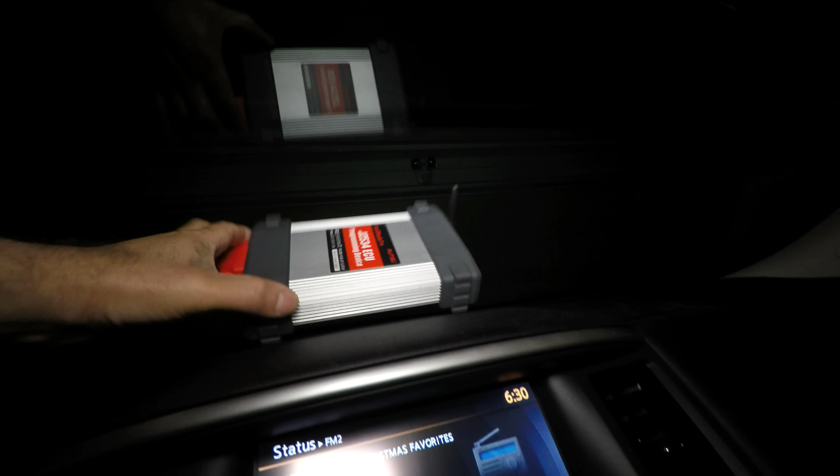Alright guys, well here I have a 2015 Nissan Pathfinder, and I have a MaxiSys Pro, and here is the programming device, the VCI, the communication wireless VCI, and you can also have it wired.

I'm gonna check it and see. This is the Pathfinder Platinum. It has navigation and a lot of stuff on there. We're gonna see what this MaxiSys Pro is gonna be able to do with this thing.

It's a 2015, so I'm just gonna shut off the lights and start recording and do the auto scan. All right, well we're gonna go to diagnostics, and we're gonna look for Nissan. Usually when you buy the tool, you're gonna have all the logos, like this.

Like Acura and Honda just updated a while ago, but the logos I actually changed them myself. I did another video on that. It's not up yet, but I will post it next to this one, how to change your logos back into the car logos.

Okay, so this is a Nissan. Actually, I sent them a report. See, it already recognized the VIN number here, that I didn't have communication with the transmission control module, and they actually sent me a beta software for Nissan.

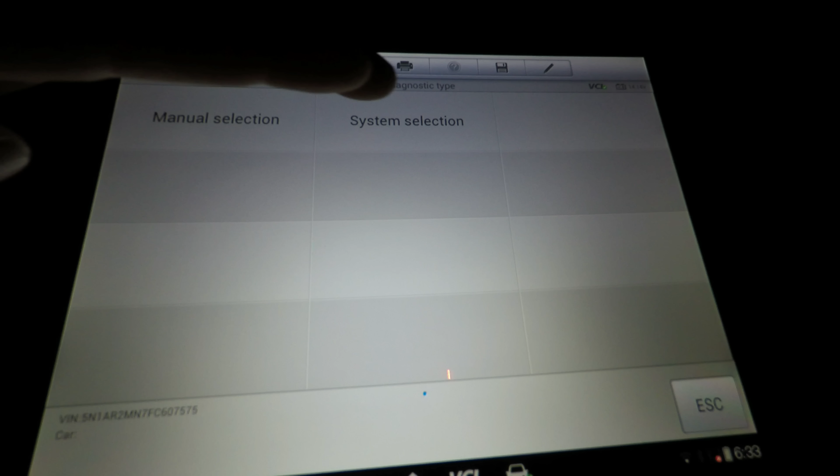So since this is a 2015 vehicle, we're just gonna check it out and see. Let's go ahead and system selection, we're gonna see what's on. Let's go ahead and see what's on service first. He has the NATS feature, which is the immobilizer, and miscellaneous functions.

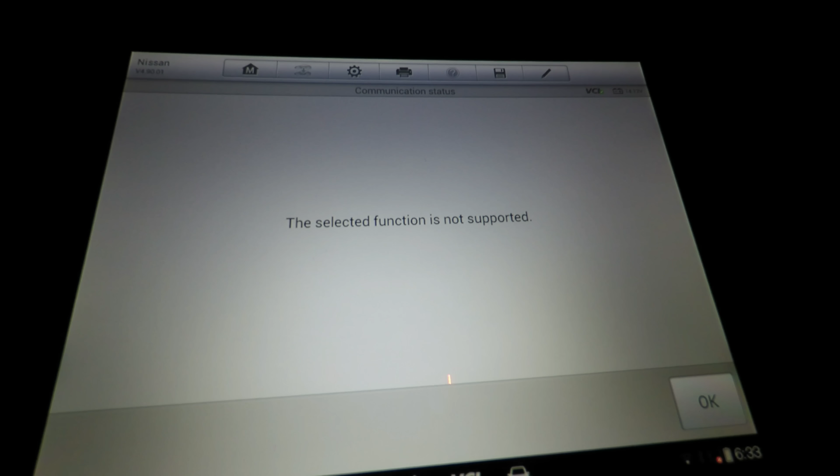Okay, that is not supported. So we hit here, we go back, and then we're gonna select diagnostics. Okay, I see that it's not. Okay, I gotta press OK. We're gonna press escape, I had the camera there and I couldn't see.

Let's go ahead and go to diagnostics. We can do an auto scan or control unit. I'm going to do an auto scan and see how many controllers this scan tool is going to be able to pick up. Actually, the vehicle is running. I'm going to go ahead and do the auto scan and see what happens with the vehicle running.

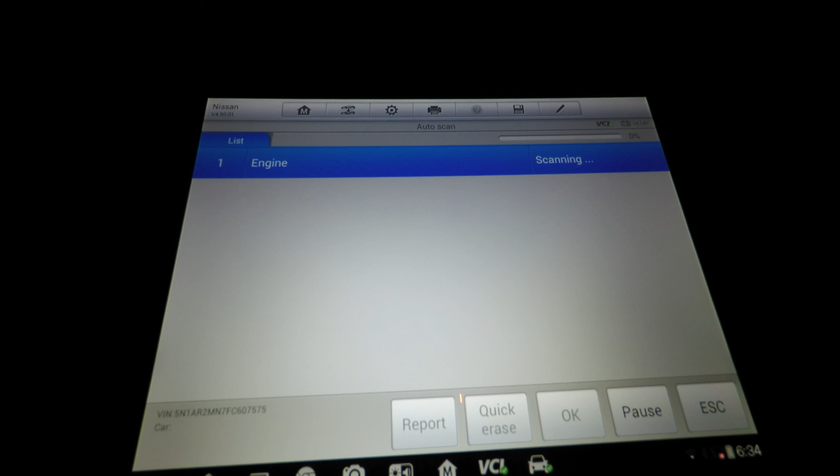It's a little bit cold outside, so I have the heater on. So it's doing an auto scan. It's gonna ping all the modules, and the ones that are there, it's gonna scan them to see what it picks up. I have a

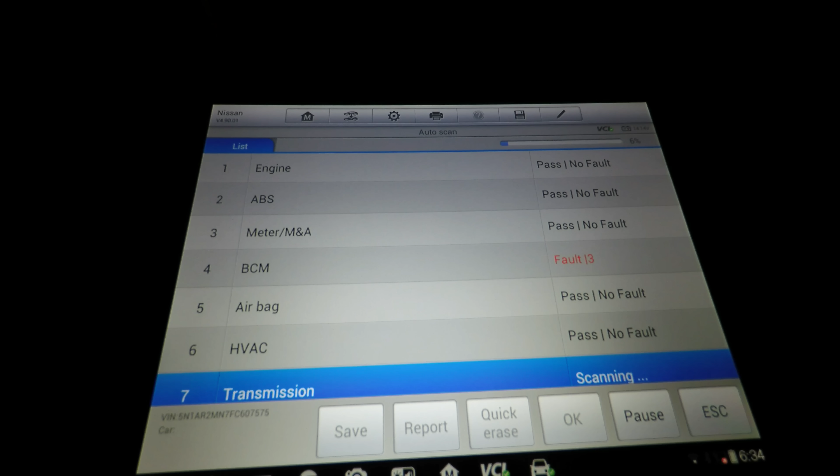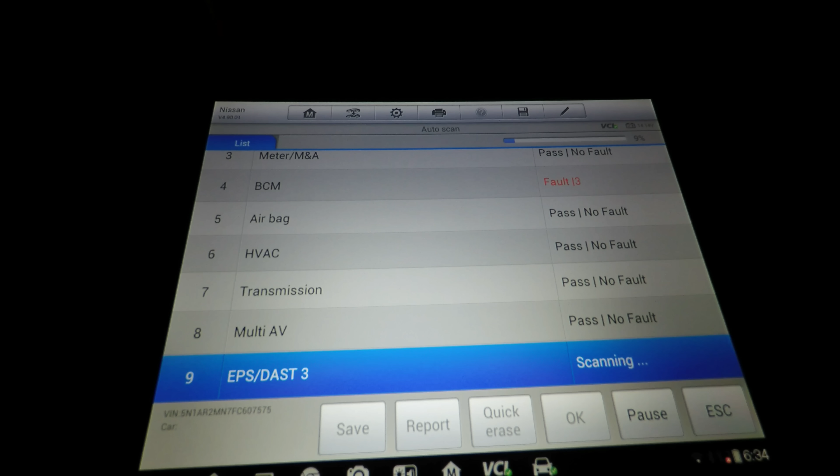tire pressure monitor light on. Body control module has 3 faults, and it's a 2015. It only has 3,000 miles, 2,933 miles. It just did the multi audio video. Body control module has 3 faults. Probably is gonna have to do something with the tire pressure.

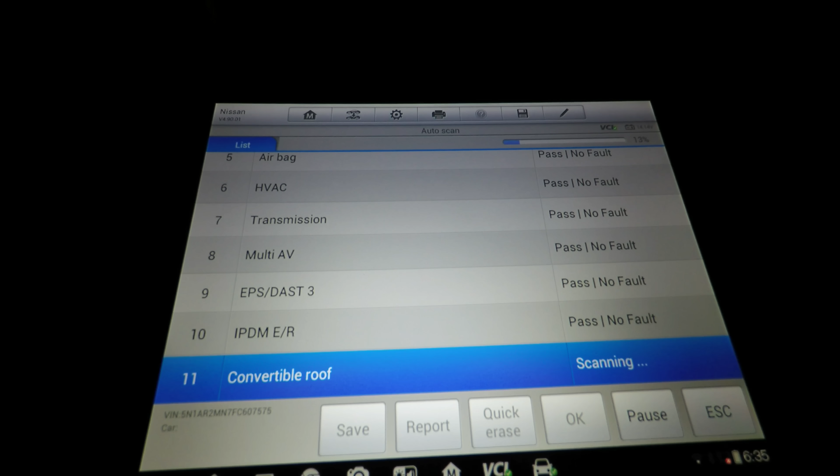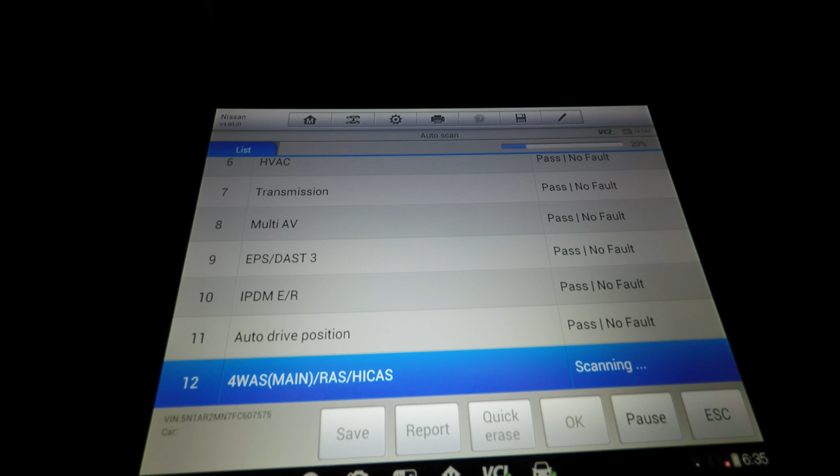It's going fairly quickly. Well, it's still over here. Once that thing is full, right now it's trying to figure out how many control modules are on the vehicle. It's going to take a little while. I'm going to keep recording, I'm going to keep it live.

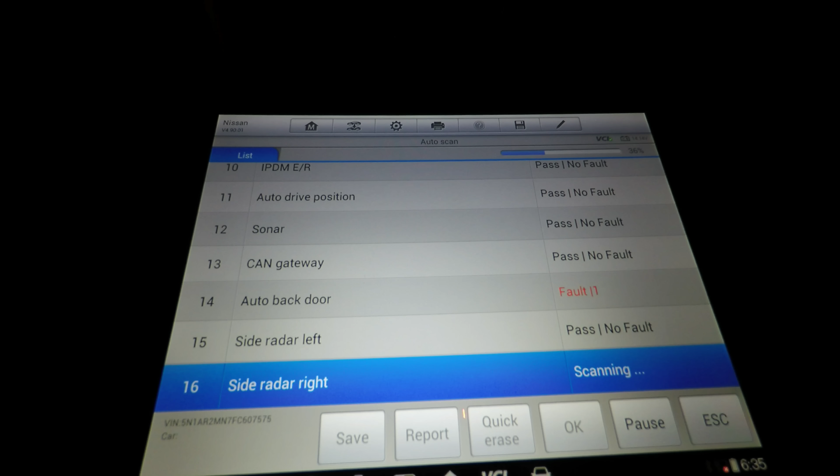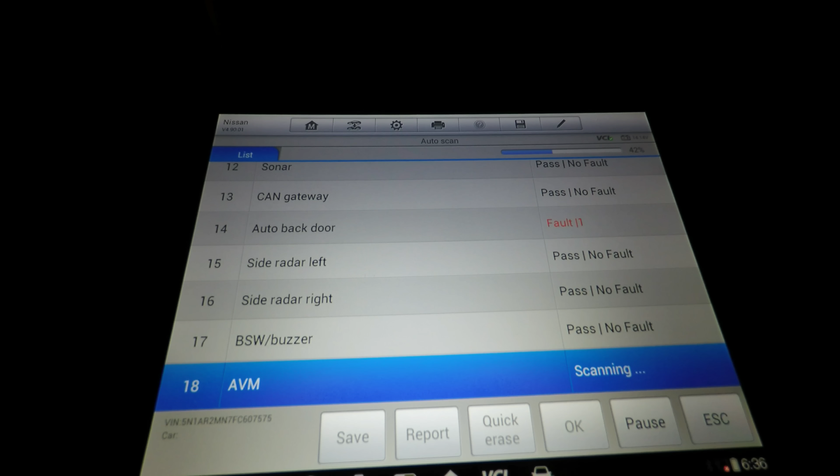Now at first, this is the beta Nissan beta software. It did not recognize the transmission control module, so I sent them a data log, and they responded fairly quickly. They sent me the beta software that they were working on to try it out, and they sent it to my tool serial number.

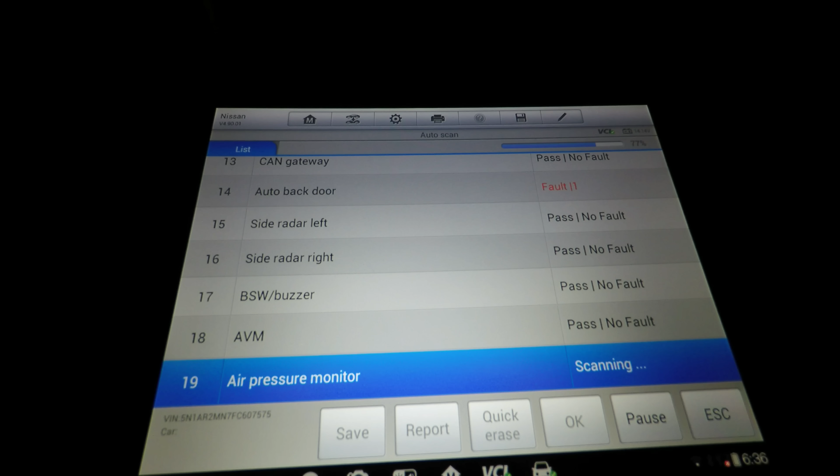And I'm kind of liking this. I barely bought this tool, but I'm kind of liking this, the way it is set up. I also own some other tools. I actually still own the 708, the DS708 from Autel as well, and I have a Snap-on Verus. Some of you guys already seen me use the Snap-on Verus and the DS708.

This is the MaxiSys 908p. The P is for Pro, which has the J2534-1 and 2 programming box with it. It comes with it. The programming is not available for now. Autel says that they're gonna come back online again. I'm not sure what's going on with that, but so far as a scan tool, it's pretty good.

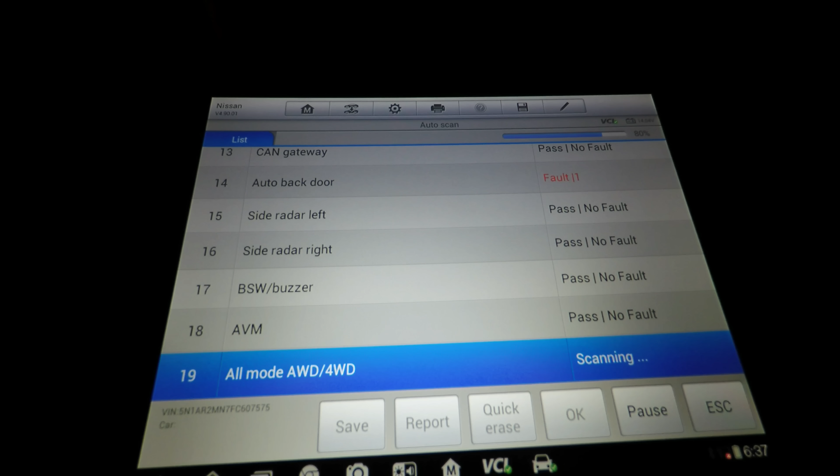The 708 is a great tool, and this is like an upgraded version of that tool, so it has to be better. Still going.

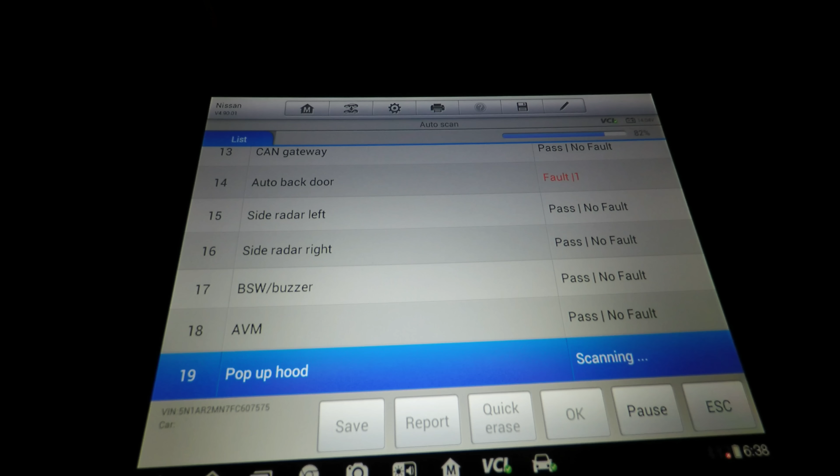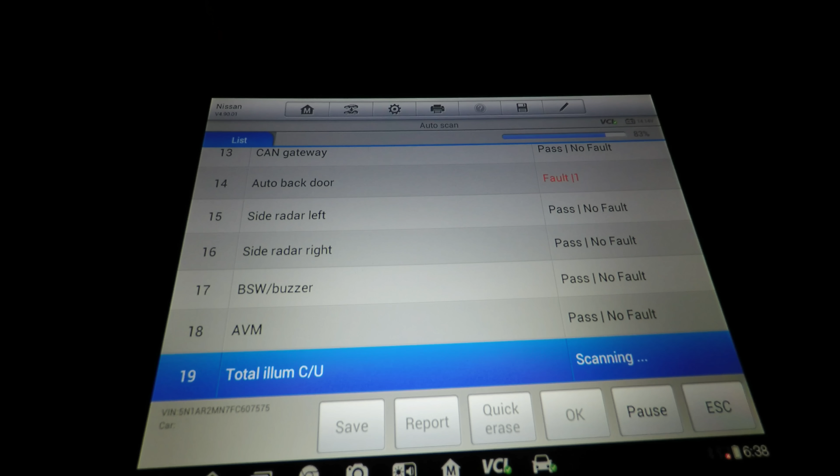We're at 83% now. What I'm interested in is the transmission control module, that's my main concern. That's what I do for a living, I rebuild transmissions. So as long as everything is good for transmissions, we're good to go. And of course, it's a nice feature that it can diagnose all the modules on the vehicle.

So like I said, it's a 2015 Nissan Pathfinder Platinum Edition.

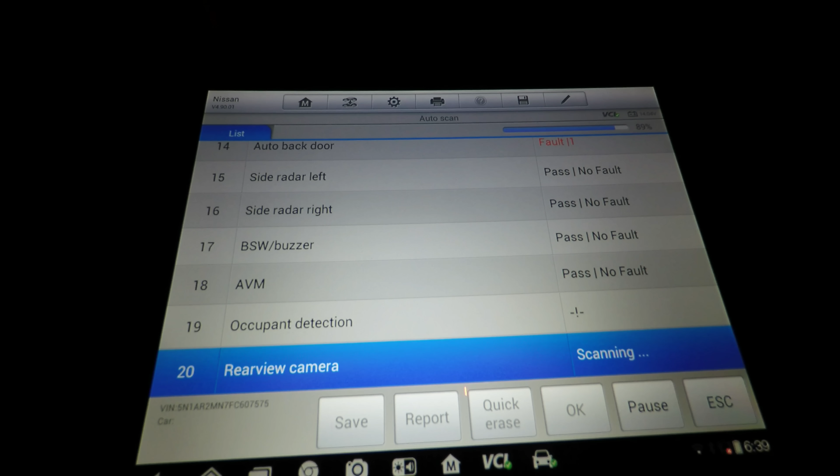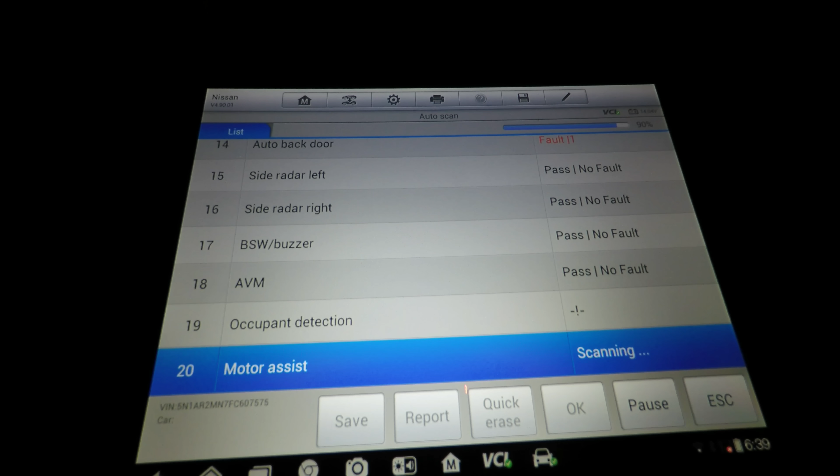Side blind cameras, he's got 2 cameras on the sides as well. I guess he didn't pick those up. When you put the vehicle in reverse, you can see the rear camera, and then the side cameras, I'm not sure where they're located, looks like they're underneath the mirrors. You can actually see the bottom of the street or driveway or whatever you're trying to maneuver.

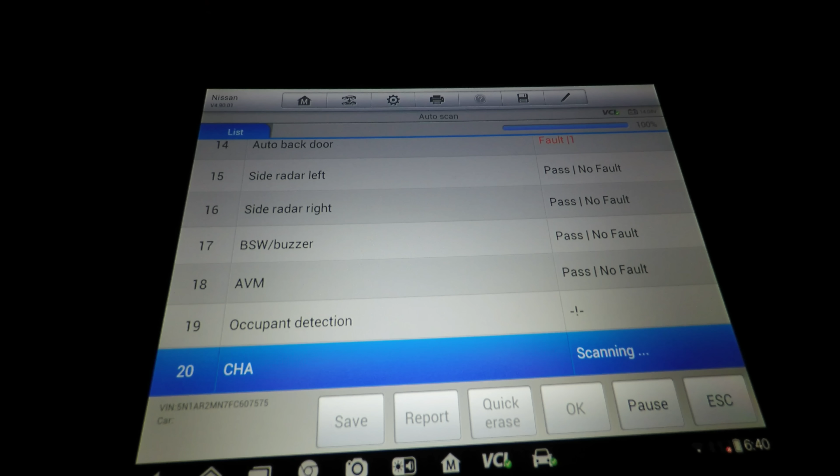It says 100%, but item number 20, or control module number 20. The good thing I like about this thing is it already scanned all the modules, right? And it found 19 modules.

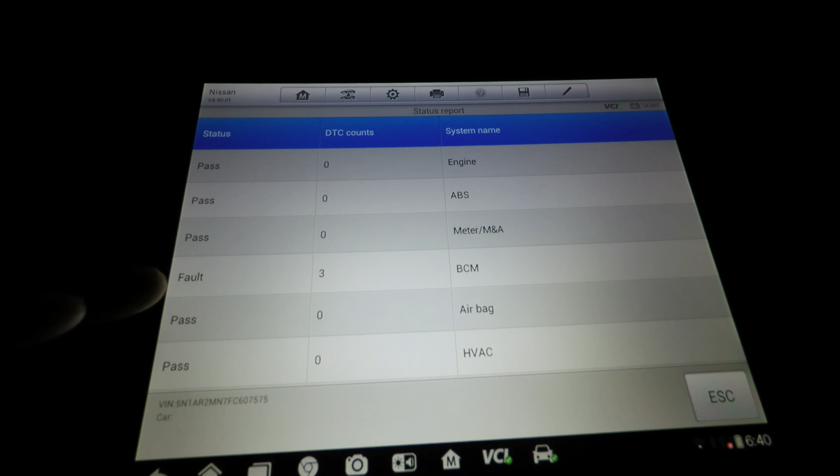Now what you can do is click a report. I'm going to click on report, and it gives you all the modules that passed. Like body control module has 3 faults, right? And then we go and look for more faults. First it's going to tell you auto back door has 1 fault. It's going to show you all the modules, and then further down it's going to give you the trouble codes.

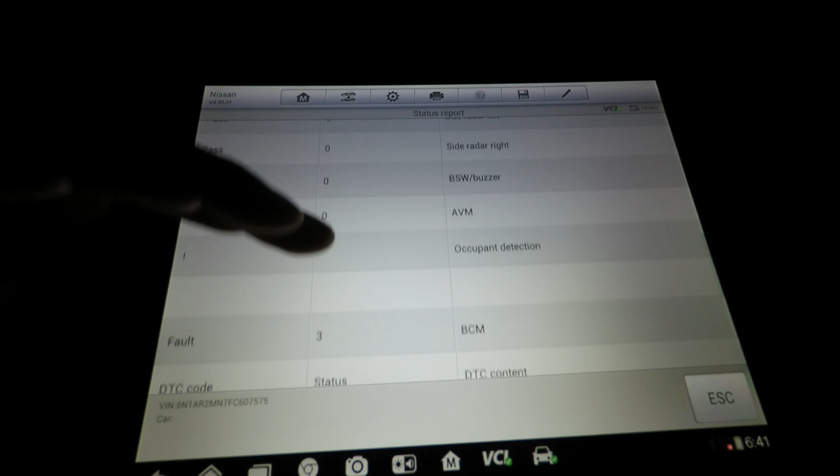Occupant detection has an exclamation mark, I guess it could not recognize that very well. Body control module has 3 faults, and now here comes the DTCs, the diagnostic trouble codes.

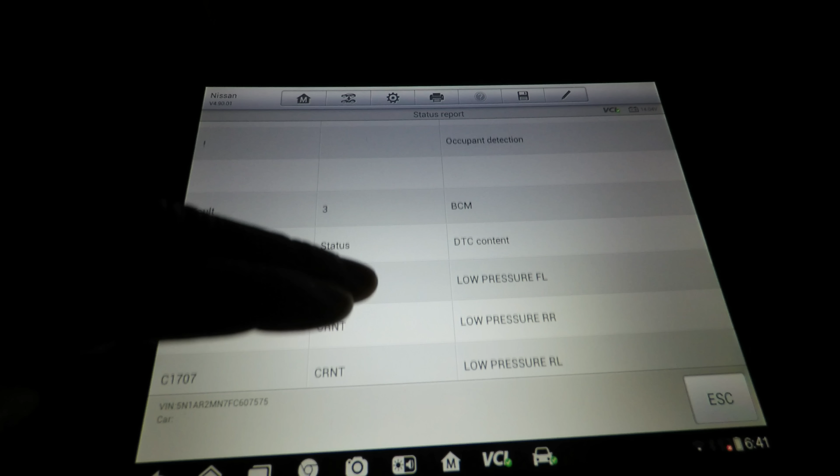Low pressure, yeah, it was related. We have 3 trouble codes on the body control module, which is low air pressure on the tires, and it tells you which one it is: front left, right rear, and rear left.

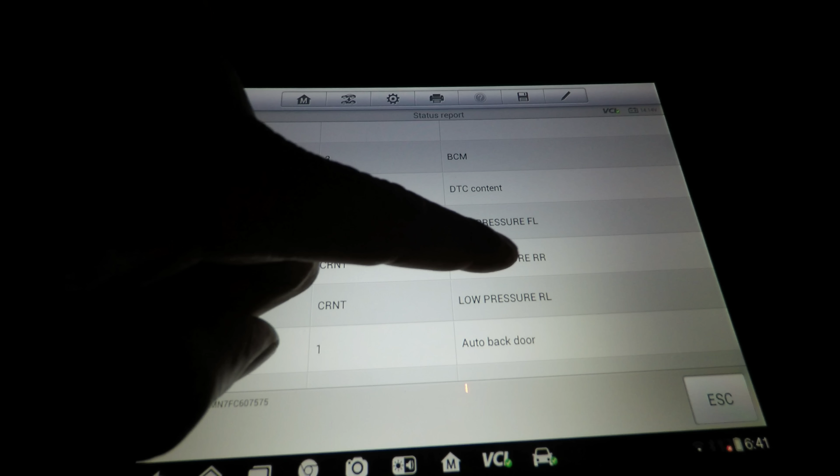And then we see auto back door fault 1, diagnostic trouble code. It has B2428 auto back door control circuit.

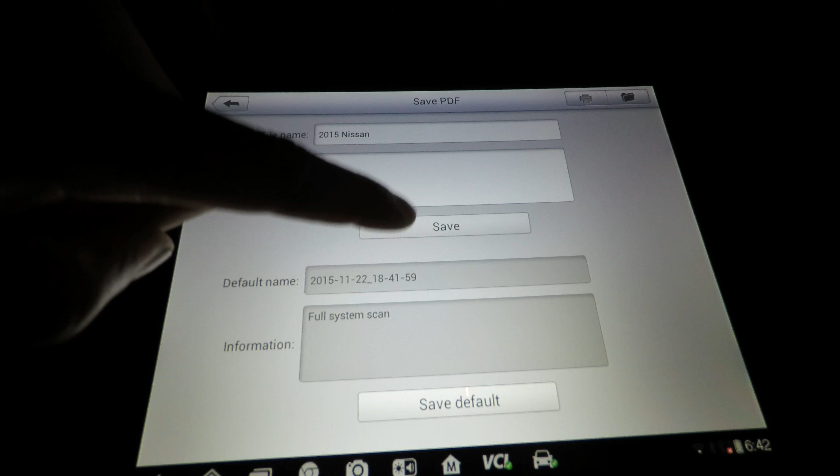Now I am going to save this file. I'm going to save it as a PDF, creating a print file. So once you save this, let me see here, 2015 Nissan. I'm going to put it here, full scan. Alright, I'm going to lower it here and save it as this file. You can save it as default, which also says full system scan.

And now we go back and we escape. Sorry, I'm holding the camera with my right hand.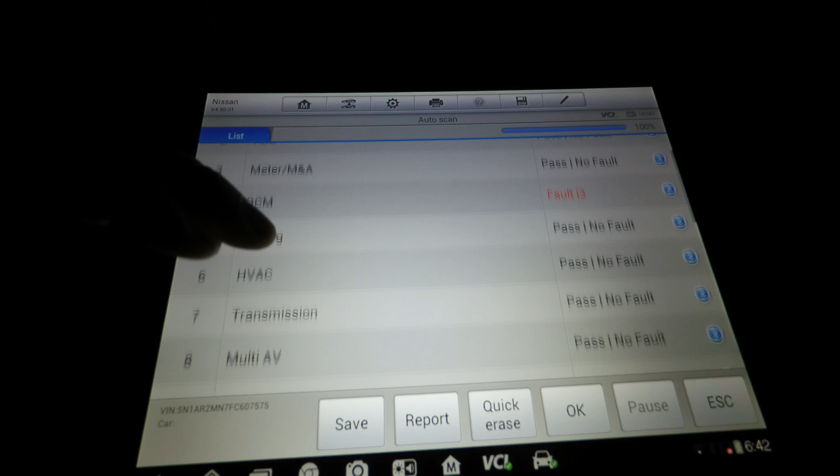Now let's look for what I want, transmission. I'm going to select transmission and press OK. Let's see how it communicates with the transmission. This is great, this is perfect.

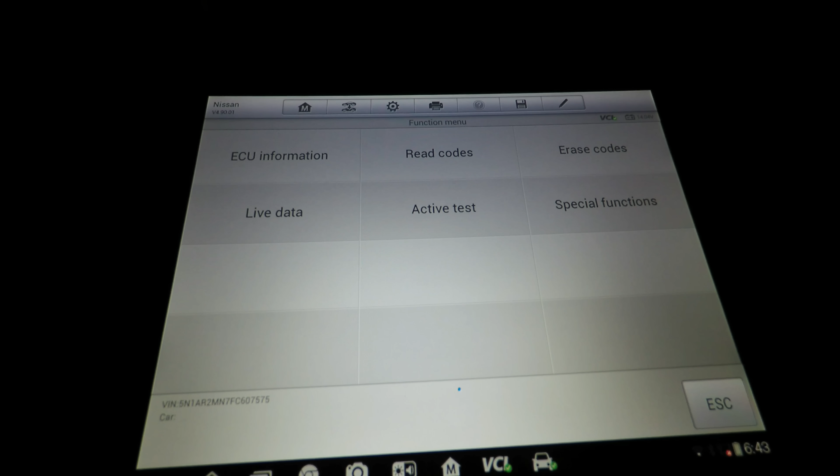Let's look at the ECU information, it gives us the ECU information. Oops, now let's escape. Let's go ahead and read codes, and we know that there were no faults detected. We're going to press OK.

We're going to go to live data. It's a CVT transmission, let's go ahead and look at some live data. And we are connected wireless right now, so there is a little lag in between. It's Bluetooth wireless, so the refresh rate is kind of fast, but it's still a little slow.

So we can see the input speed sensor here, primary speed RPM, that's the primary variator, secondary revolution sensor, that's for the secondary variator. So we can see the secondary pressure sensor. It has a primary and a secondary pressure sensor.

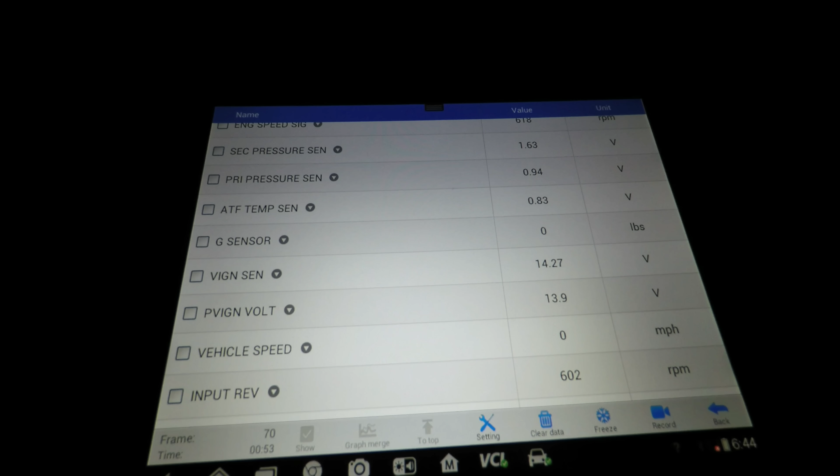These are very common to go out, like the older CVTs, Maximas, Muranos, Sentras. We have some other inputs from the vehicle speed, so it seems like it has pretty good data.

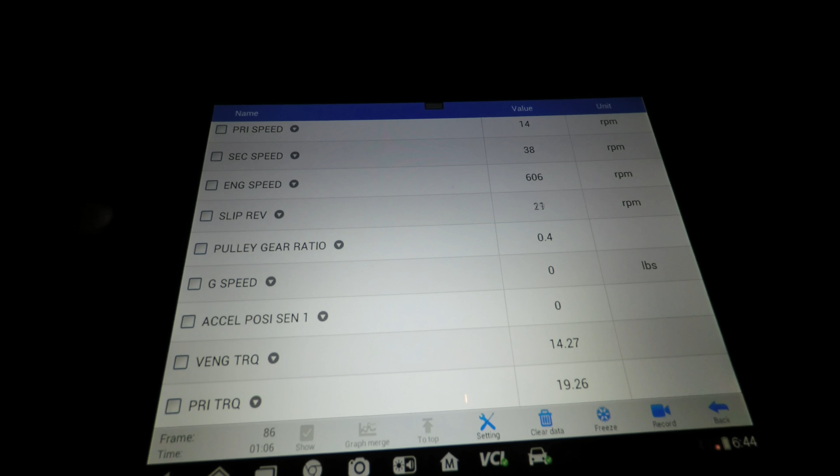Pulley gear ratio, it gives you the calculation of the gear ratio. Slip revolution, this is actually the torque converter clutch, when it engages you can see the slip RPM on it, and some other data.

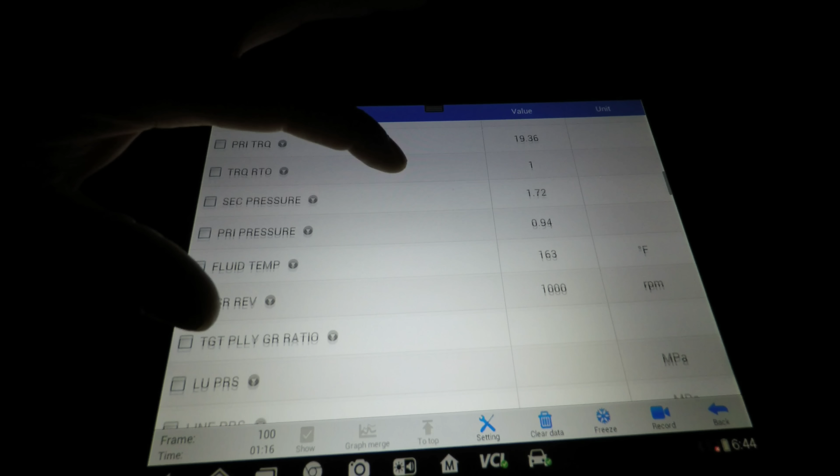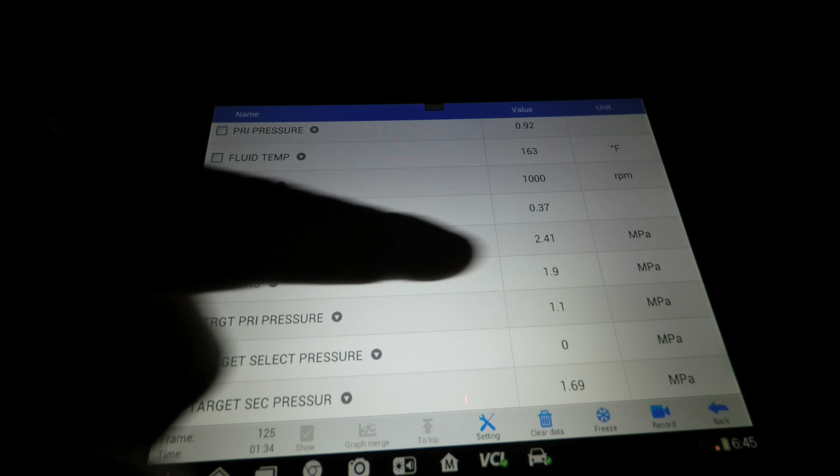Primary pressure, secondary pressure, it doesn't say on what units it's reading those. It would be nice for them to add this, but like I say, it's a beta software that they just released for my tool. Line pressure, we see here MPa, I would like to see it in PSI. Here in the United States, that's what we use.

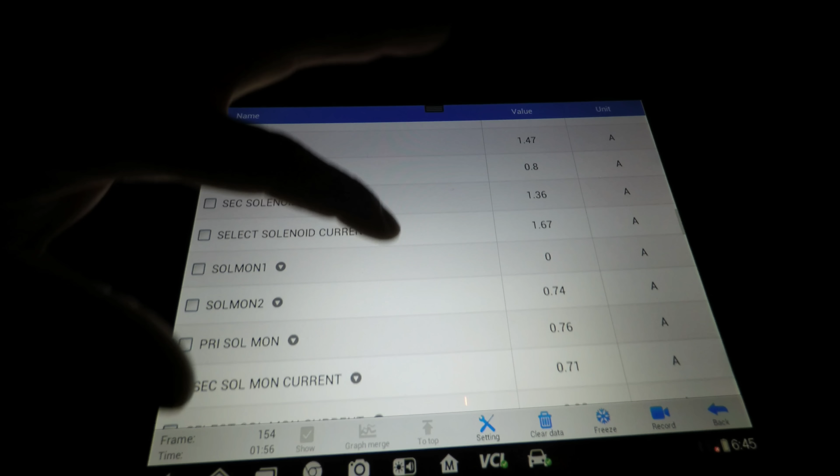Target pressure, solenoid monitor, LT1, LT2, primary solenoid, secondary current. It actually shows you the current in amperage. Solenoid monitor 1, 2, primary solenoid, secondary solenoid monitor, the current or amperage.

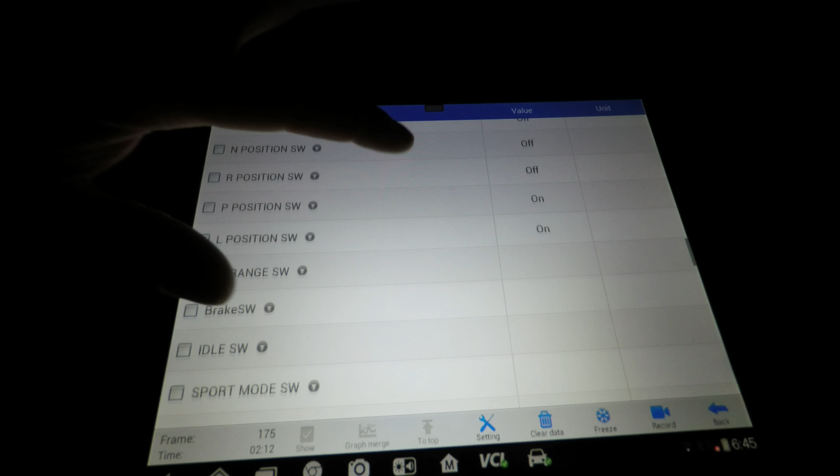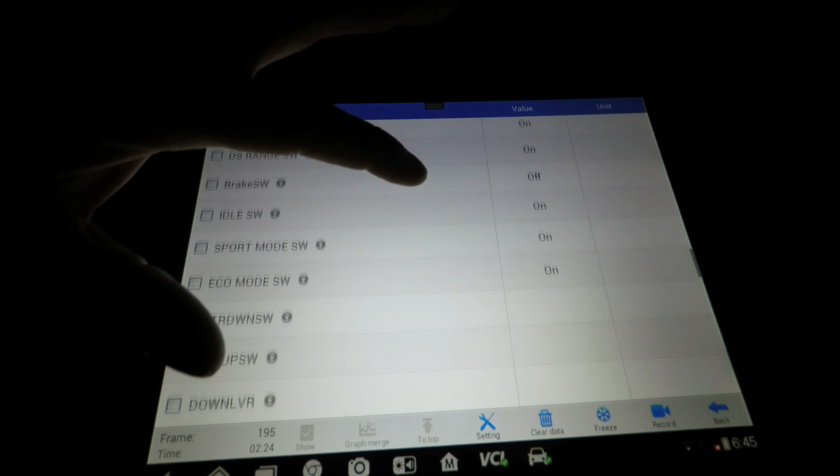Here we see the transmission range sensor, all the positions. It's in park, so you're gonna have this one on, and that's how the computer knows where it's in park. That's a transmission range sensor.

Sport mode, eco mode, down lever and up lever, that's the Tiptronic, like if you're shifting it on manual mode. Normal mode, manual mode, tow mode. It has a tow package. This vehicle does. CVT lamp.

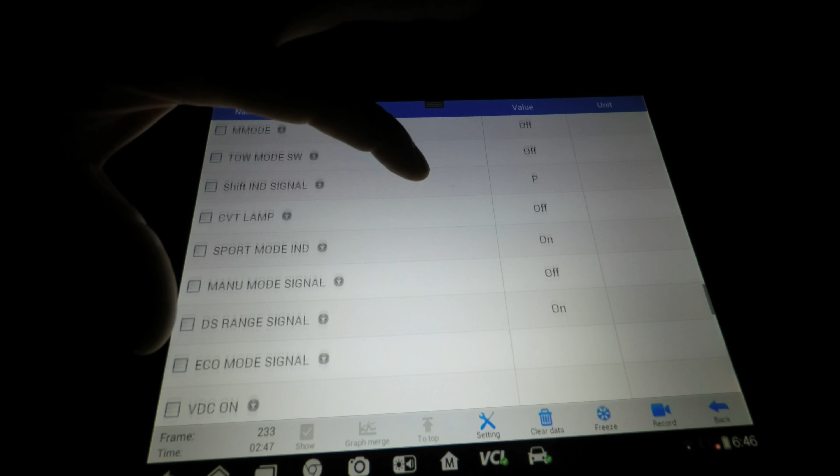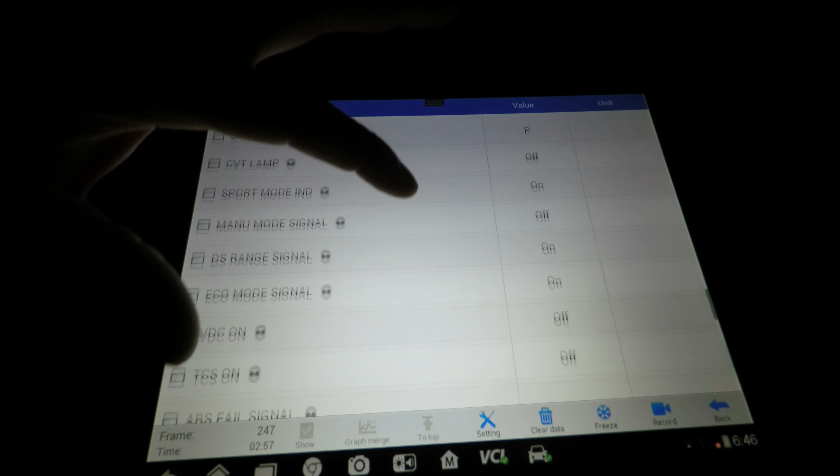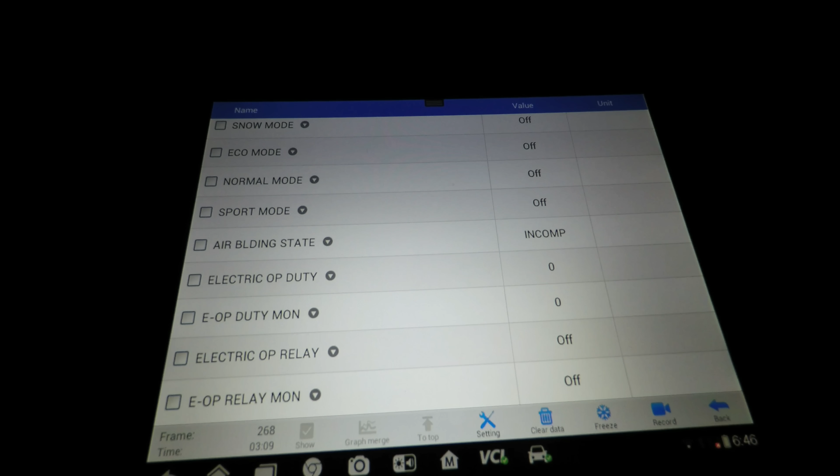There should be a CVT lamp on the instrument cluster. It's a warning lamp, like the check engine lamp. So we see, I'm pretty satisfied so far, and this is the first time I hooked it up after the update, and it ends right there. Alright, let's go click back.

Let's see what's on active test. We're not going to touch anything on active CVT oil cooler fan circuit. So it actually has a fan for the CVT oil.

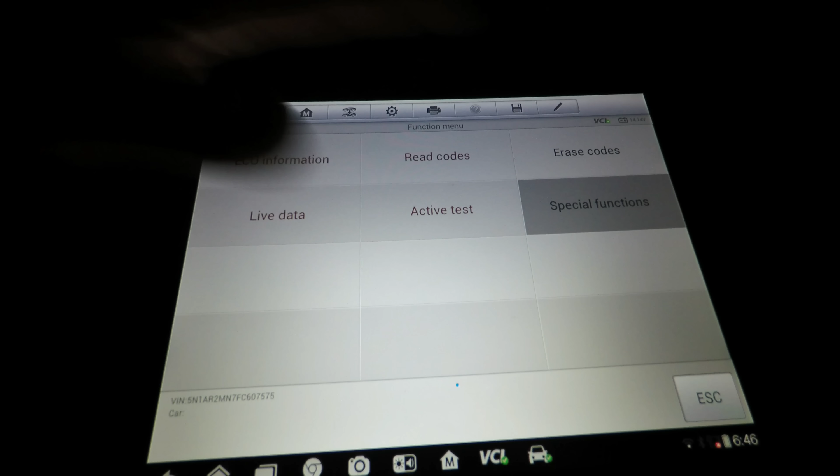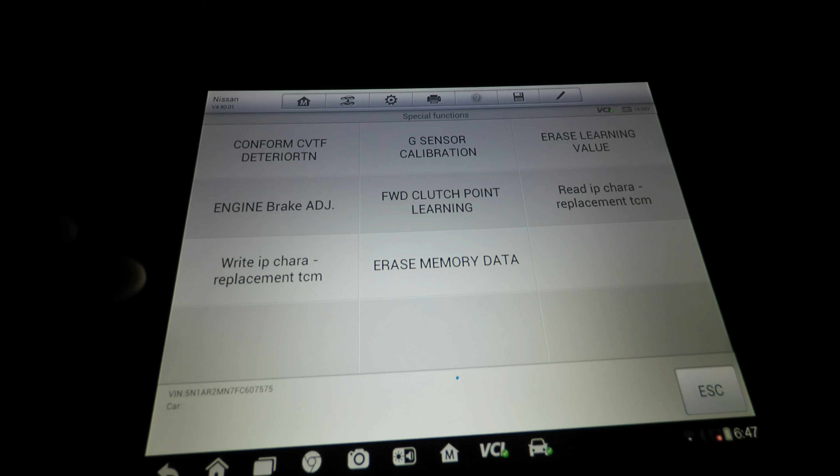Let's go back. Let's see what's on special functions to see if there's like initialization, confirm CVT deterioration, G sensor calibration, erase learned values, engine brake adjust, forward clutch point learning. Well, that's pretty cool. Read IP Chara replacement TCM. Write IP Chara replacement TCM. Okay, so we have an option here to program a replacement TCM to this vehicle. So I like this, I like the way you read the data first, and then you replace the TCM and you rewrite the data.

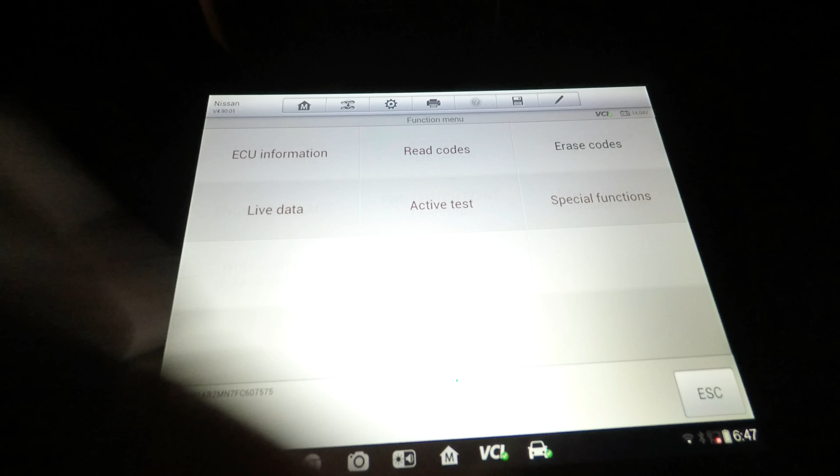Alright, let's escape. We're not going to touch nothing. We don't want to mess anything up yet. Alright, well, let's go ahead and exit.

Let's go ahead and see the engine. Let's see what the engine looks like. I'm gonna press OK.

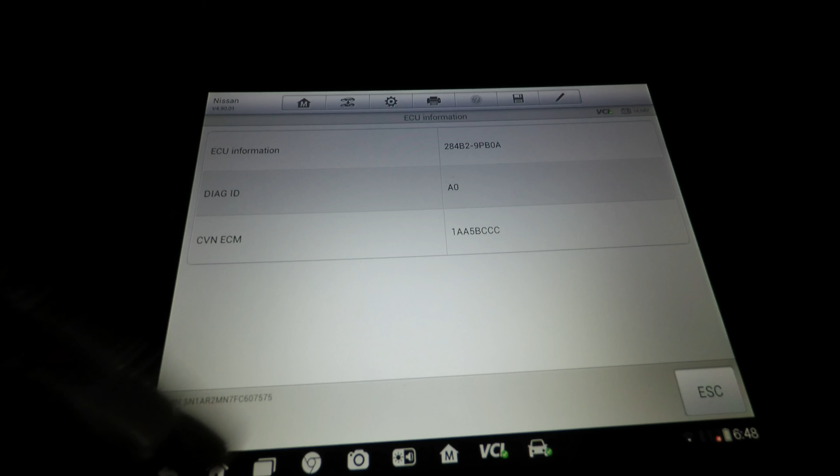ECU information. It's going to give you the information on the ECU, diagnostic ID, the CVN, ECM, and the information number. Let's press escape.

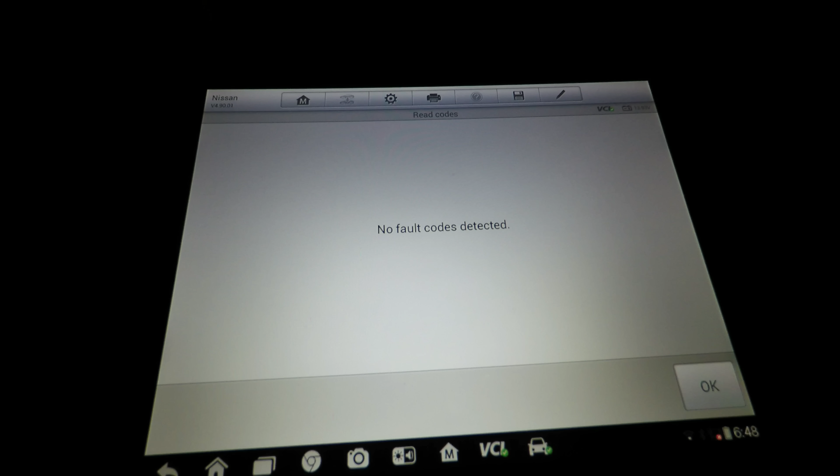Alright, let's read codes. There's no codes as you saw on the full scan. There's no codes on it.

Let's go look at live data. Let's see how it puts the live data. Okay, it puts it all in one. On the previous version, you would see data 1 and data 2. Well, that was on the transmission side. It wouldn't communicate with this, but on the older vehicles it would.

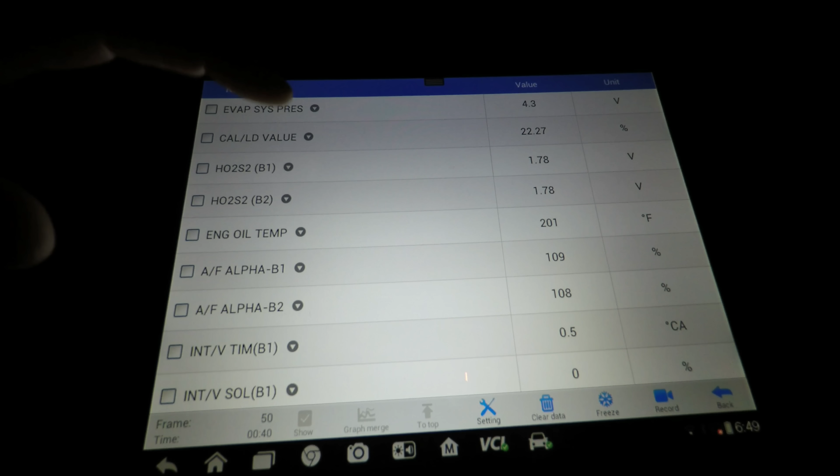Here we see the O2 sensors. Let me show you something right here. We're gonna click on this, and you can actually choose. On some of them it's not selectable, it'll be gray, but on the ones you can, you can select a gauge like that on the O2 sensor or any data parameter.

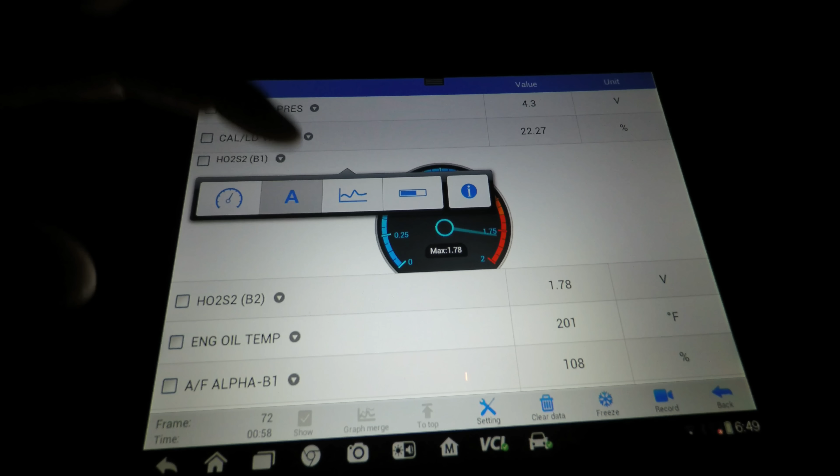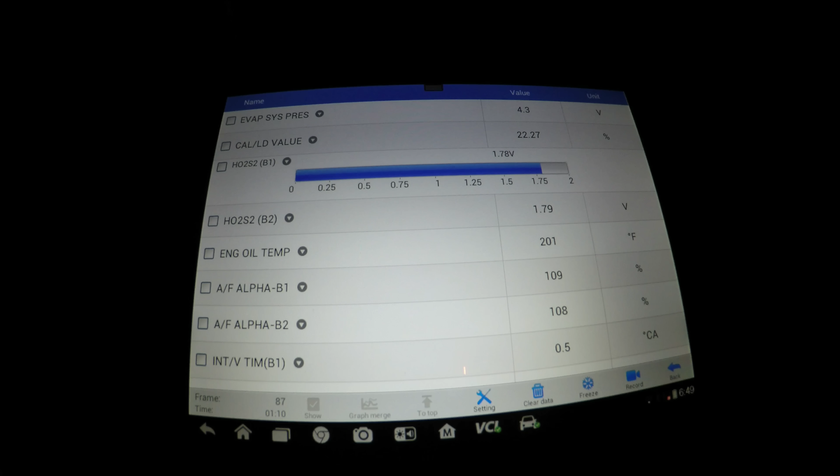Let's go ahead, and this A is like the way it is. You can put it in graphing mode, and this is pretty cool for me. Whenever you have shift solenoids, you can actually see when they come on and off. Let's change it back to A.

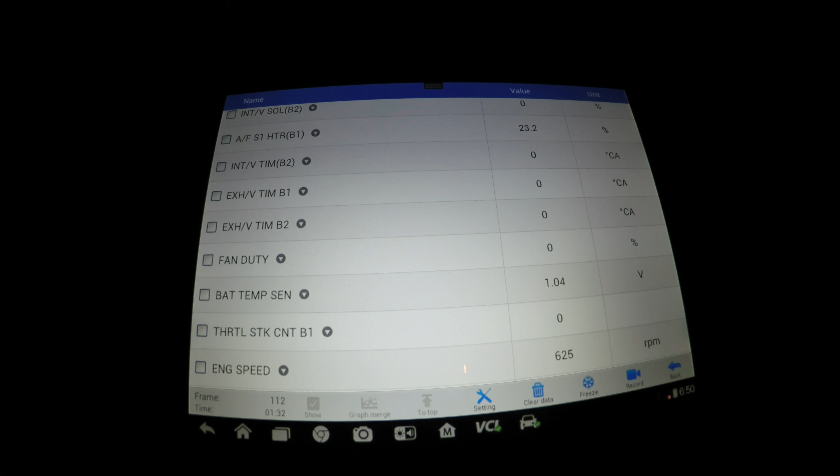Let's scroll down, just look at some more data. Here we see the valve degrees, the intake and exhaust valve, the variable valve timing solenoids. We can see the fan duty cycle, it's not on, it's cold outside. Battery temperature, engine speed, injector pulse width.

Mass airflow sensor. It reads in pounds, not in grams per second like we're used to here in the US. We have an IP pulley speed. Not sure what that is. I don't think it's transmission related.

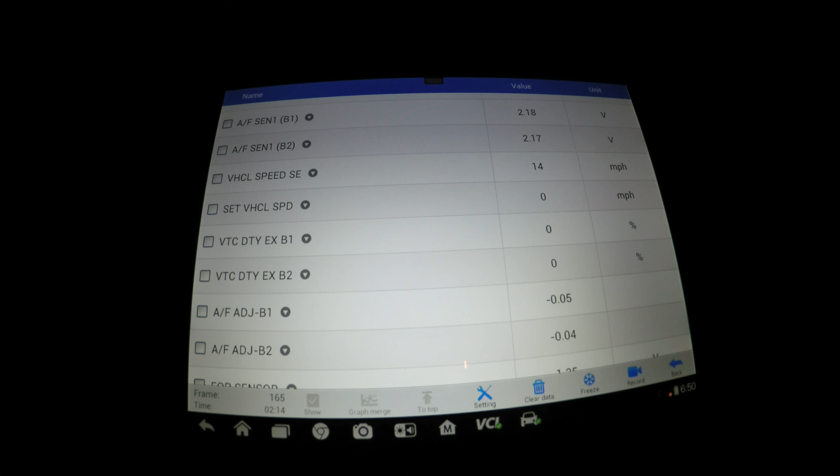Air fuel sensor, bank 1 and bank 2. It has air fuel sensors for the upstream, and we saw some O2 sensors, but they're probably, I didn't even pay attention to them, but they were probably for the downstream.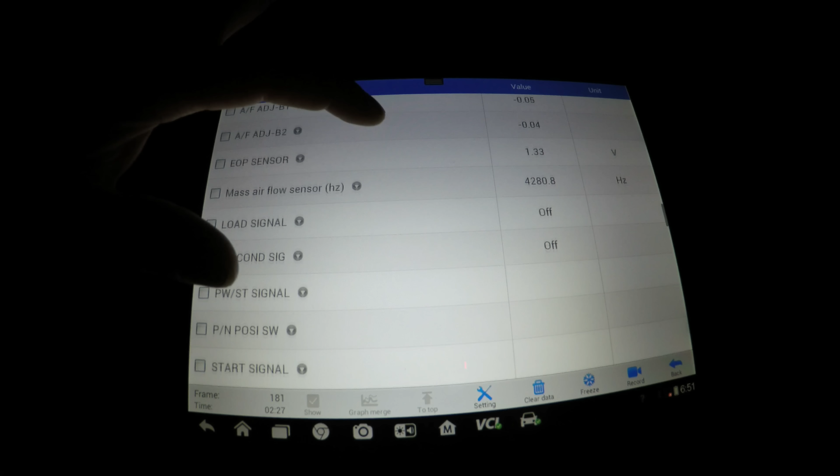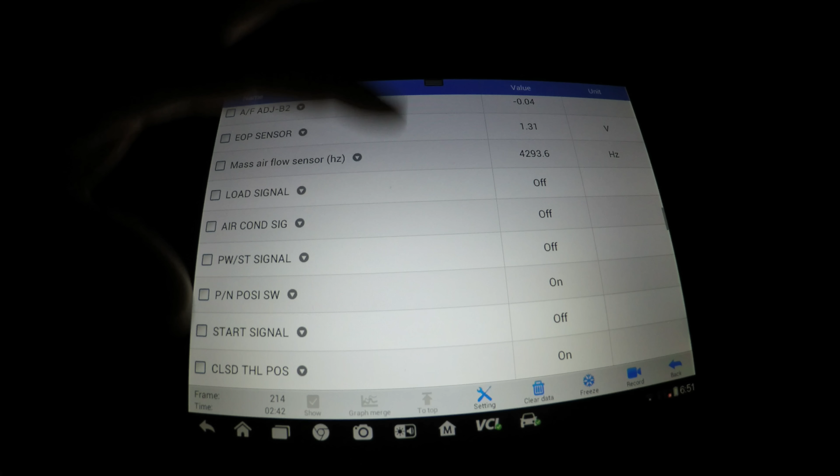Mass airflow sensor in hertz, 4,200 hertz. That's pretty cool there, we have two different types of data PIDs for the mass airflow sensor. On Fords it's like 160, 159 hertz at sea level. I'm not sure how that is being calculated, but we have that.

Heater monitor, O2 sensor heater. Closed throttle position, we see on. Start signal off. Ignition switch is on. Heater fan on.

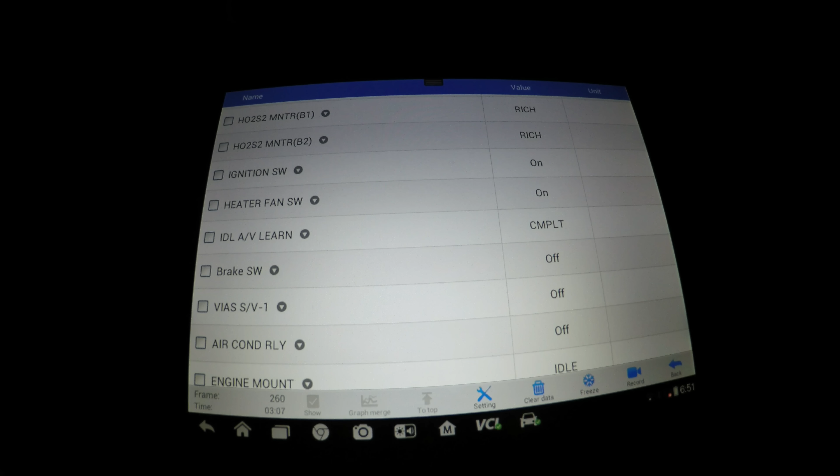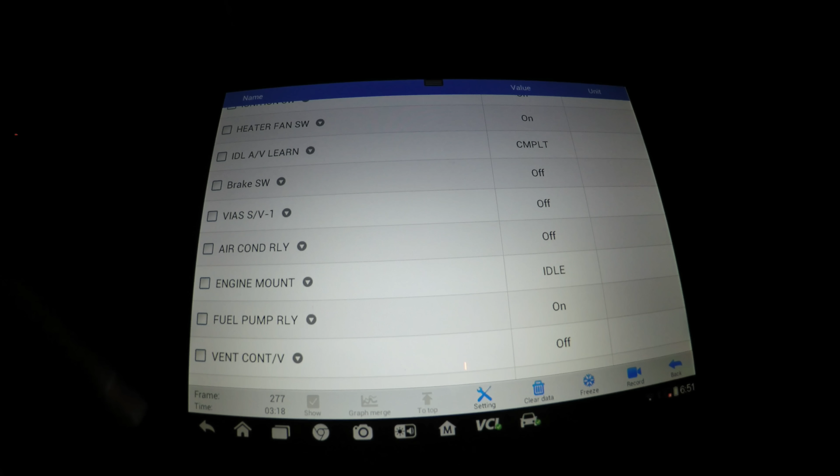Idle air volume learn complete. Brake switch, let me press the brake switch. Brake pedal on, brake switch.

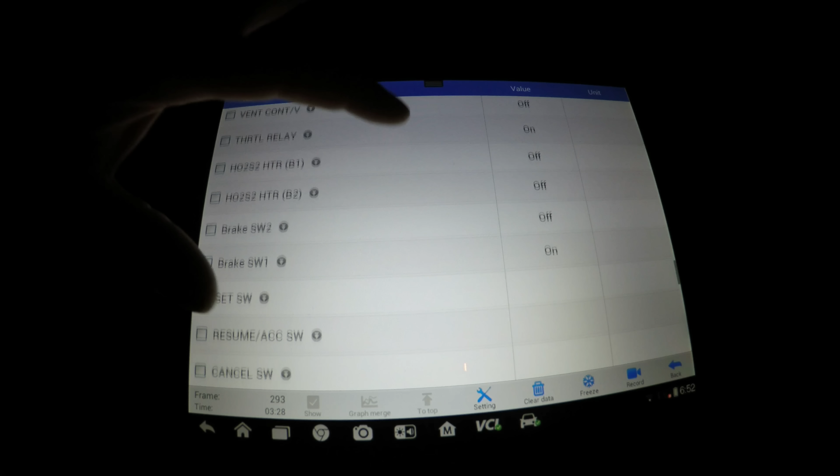VIAS solenoid. Fuel pump relay, it does have a lot of data. We see again O2 sensors, heater bank 1 and bank 2. That's the sensors 2.

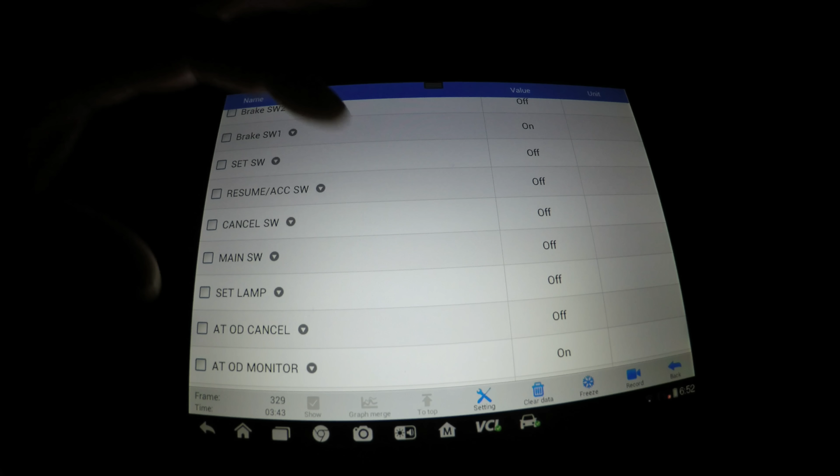That's the cruise control data PIDs. We see the cancel switch, resume, accelerate, the set switch, main switch, the automatic transmission cancel switch, overdrive, vehicle speed cut.

Alright, well, I'm liking this. Let me just scroll down, and we're at the bottom of the page. Let's go back.

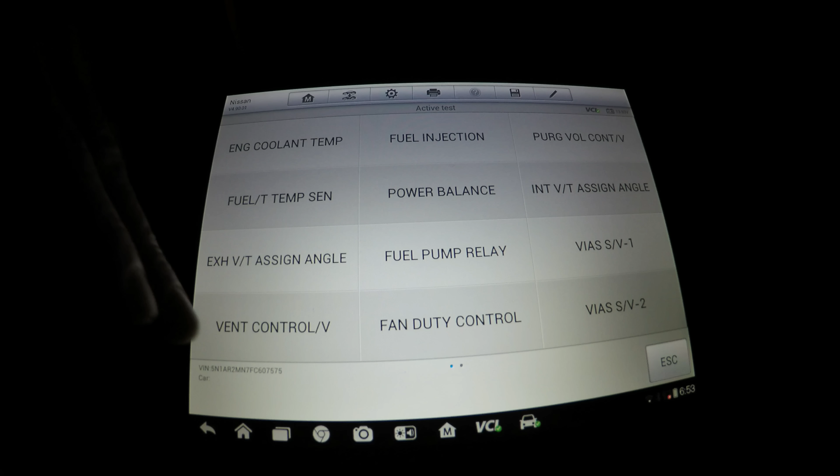Let's see what's for active tests. We see engine coolant temperature, fuel injection, VIAS 1, VIAS 2. I guess he has one for each bank. Vent control solenoid, fan control. It has two little dots here, so there's another page. Ignition timing.

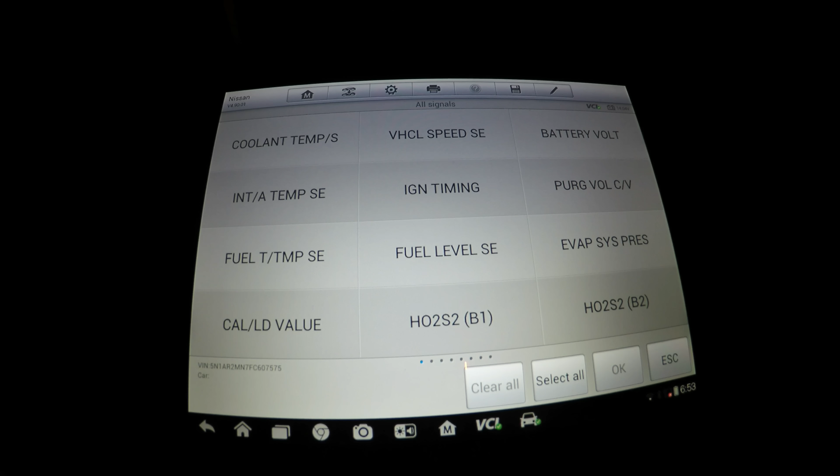Let's check, select fuel injection, and we see some different things, we have a lot of anything that has to do with the fuel injection system. Ignition timing, purge valve solenoid, fuel level sensor, HO2S2 bank 1. You can see all the data, I mean all the tests that you can do.

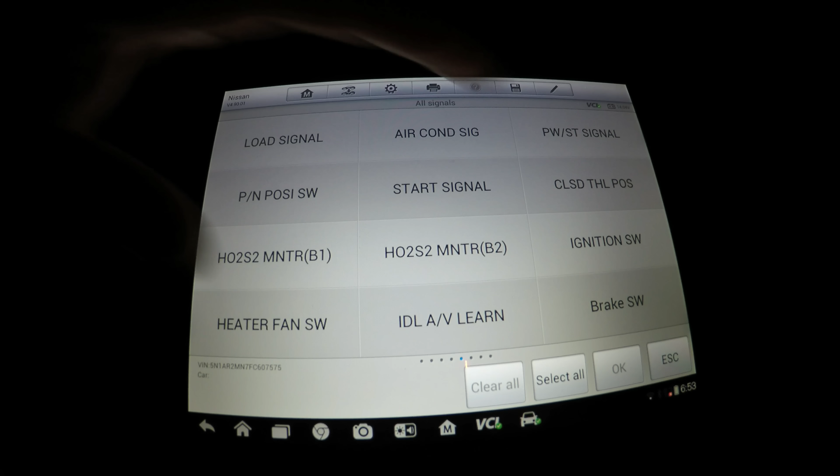So it's a pretty cool tool. Let's go ahead and escape that. Okay, let's escape that. Escape, let's go to special functions.

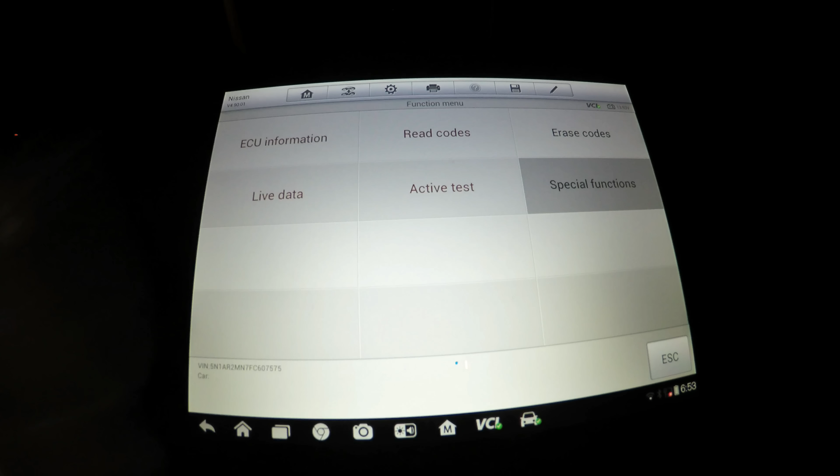Special functions, idle air volume relearn. We as transmission rebuilders, we use this a lot on the Nissans, and actually every vehicle that we can do an idle volume relearn on the throttle body, because that's very important for proper transmission operation.

We have two dots, let's go ahead and go to these, these are actually troubleshooting, like for air fuel sensor. It gives you trouble codes. Let's escape that, escape it again, and here we end up on the reports page.

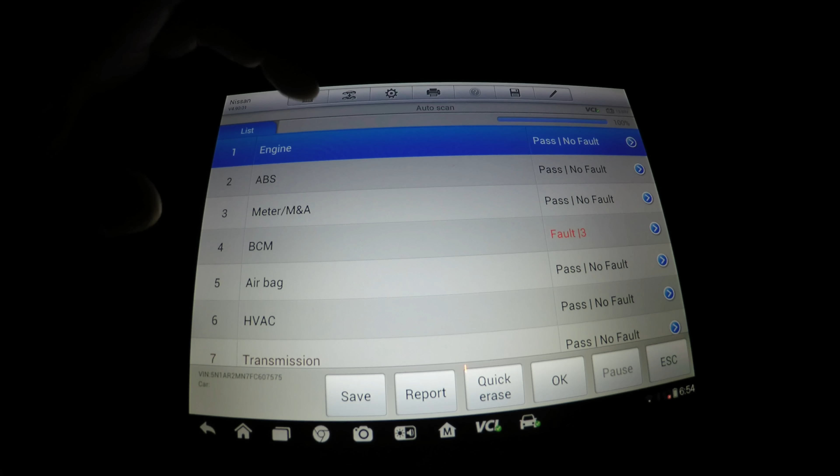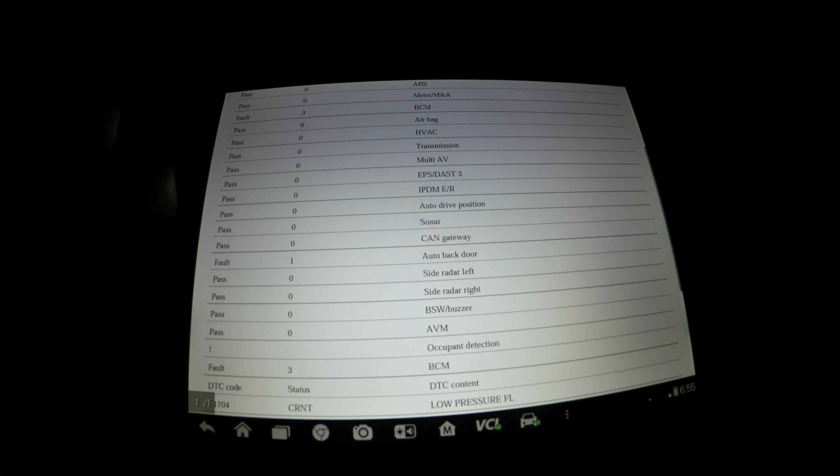Now we're going to click the M over here, and we're going to go to data manager, and we're going to click on PDF, and we're going to click on this one here, and this is the way it's going to show whenever you print the report. As you can see, that's the way it's going to look. It looks pretty good, I mean you print this page and you give it to your customer.

All right, let's see, let's go out. Data manager, settings, update. You click this update.

MaxiFix, it's like a cloud-based information forum or something like that. Support, this is where you do your data logs.

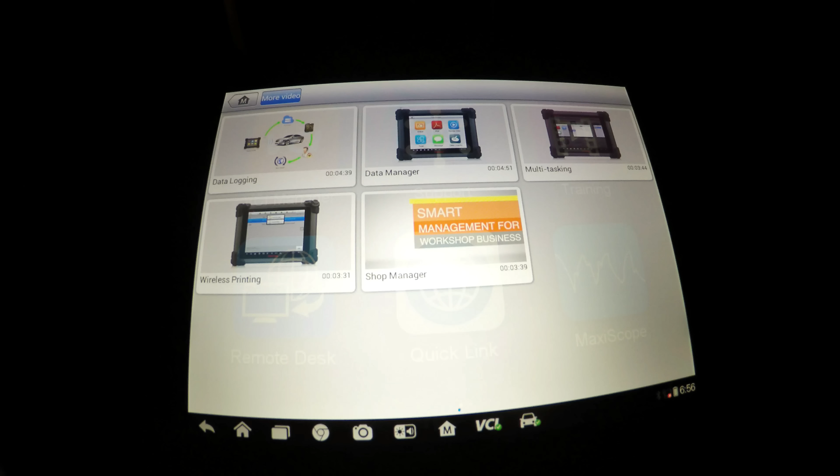On training, this is a digital inspection bore scope. I also bought that thing too, the MaxiScope, I don't have it yet. It's coming, I'm not sure how that's going to turn out. The training videos, they don't have a lot of stuff on there, but I mean this is what they got so far for that.

Quick links, you can connect to the Autel website, All Data, Identifix, Mitchell 1, the portal for reprogramming, NASTF, IATN, TST seminars, auto data, and this is a website, I guess they sell tools or something like that. I'm not sure. They can also help you remote with remote desk.

Let's click on support. So it's asking me for data connection, and I'm kind of far away from the Wi-Fi, so it's not connecting.